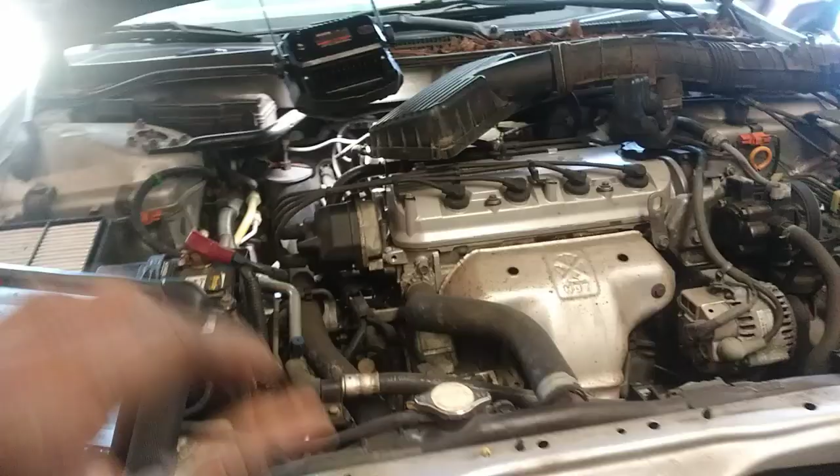Got a 2002 Honda Accord. It's got 2.3 VTEC. This car, of course, came from the dealer, the guy that's selling cars from the auction, and mind you, every time I get a car from him, it's always an interesting backstory, something interesting.

So I'm gonna cut the car down for a second, and we'll look at freeze frame data and give you the basics of what's going on with it, and we'll go ahead and tackle this issue, get this resolved, and out the door. I'm gonna go ahead and pull codes.

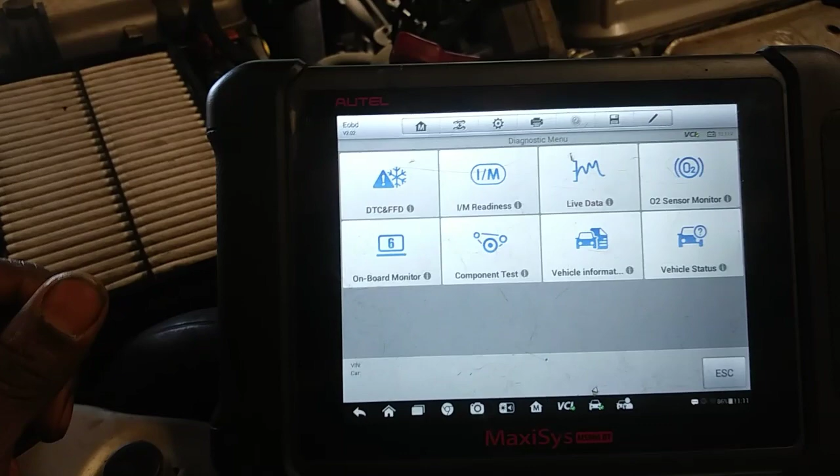I'm in the generic feature only because in the bidirectional portion, I didn't have the same information, and I didn't have as much PID data for bank 2. So some cars are better than others with the Autel, but I'm gonna stay in the generic portion here. The code that came up was dealing with the heating circuit for the downstream.

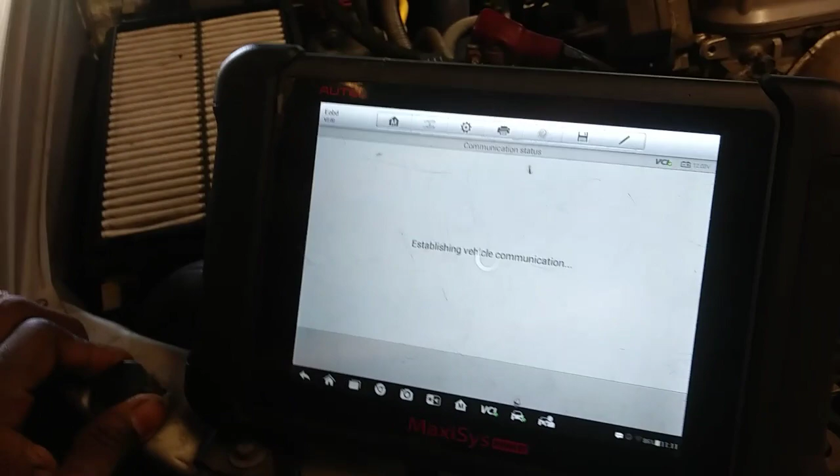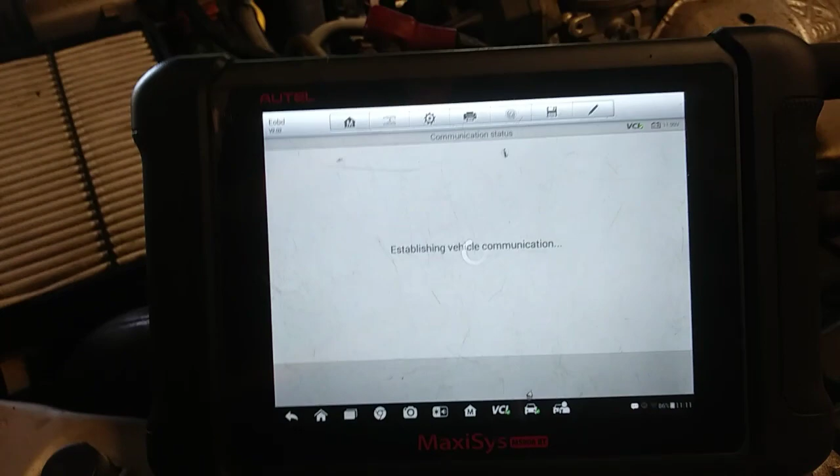From what I understand, the car's catalytic converter was stolen, so they put an aftermarket one on here with the aftermarket sensor. The aftermarket sensor has the Bosch shape. It's a Bosch sensor, and if I recall, Denso is what goes on here. Yeah, I think Denso. So this is the code P0141 O2 sensor heater circuit, bank 1, sensor 2.

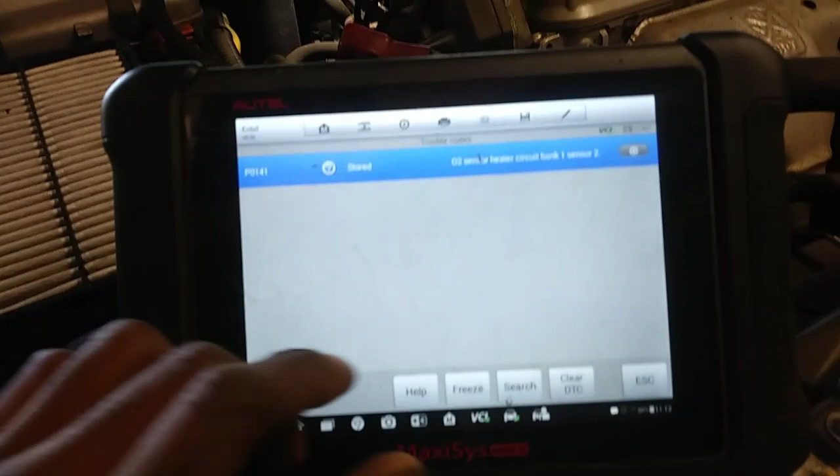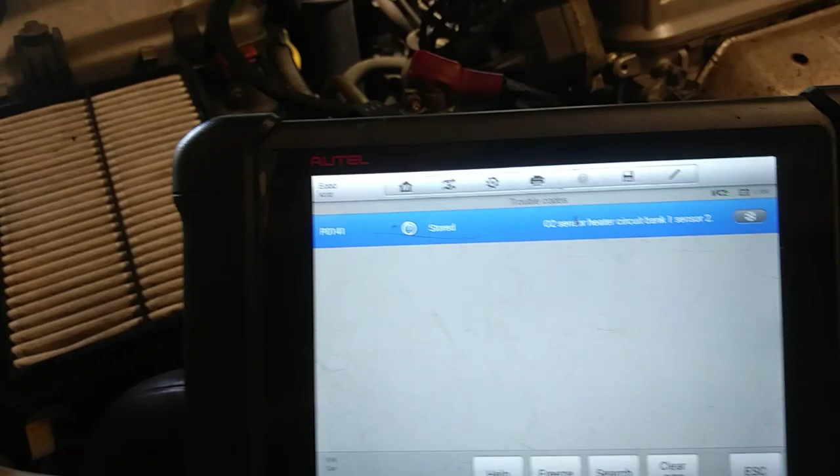So that code is basically stating that there was incorrect voltage during startup or after a certain amount of time. I think it was like after 80 seconds after startup, it was determined that there was incorrect voltage. So the sensor, it shouldn't be oscillating, but this is an oxygen sensor, so it should be between 100 millivolts and 900 millivolts.

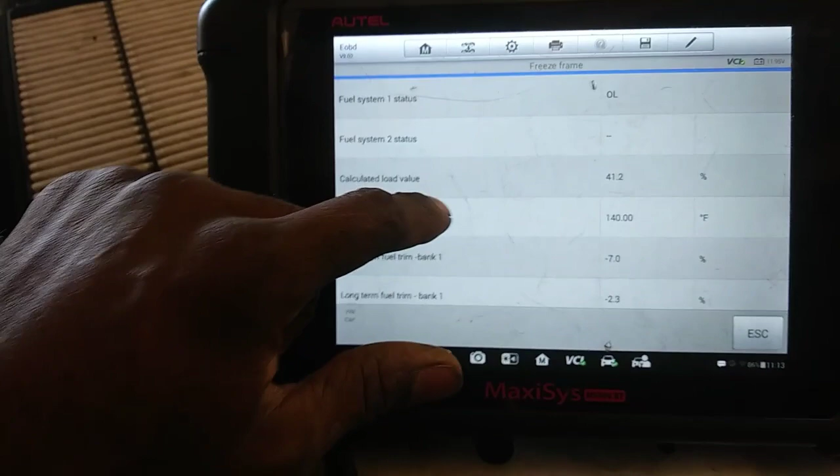So unfortunately, it determined that there was higher than normal voltage, and that's how we determined that there was a fault with the sensor here. So let's see what we got. If we look at the freeze frame data, so I can get zoomed in here, it doesn't show much as far as the running conditions of what happened, and it doesn't give me downstream information, and it's generally pretty useless

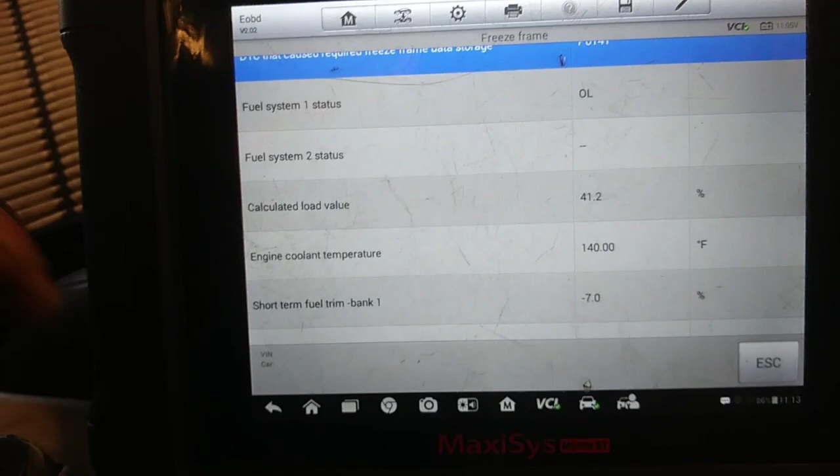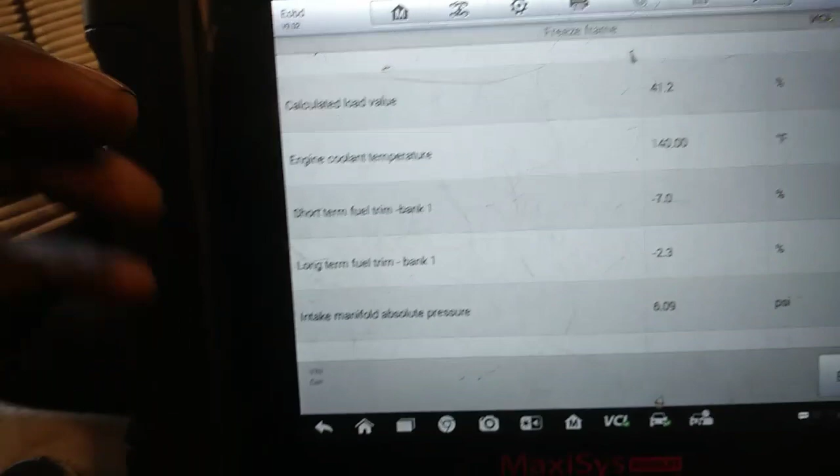for the catalyst issue. But if it was something more related to the primary upstream, this would be a lot more informative. But from what I observe, this is really not going to help me out to a degree, sorta. But what happened? The fuel system status was an open loop. So the oxygen sensor heater went through its monitoring phase in an open loop status.

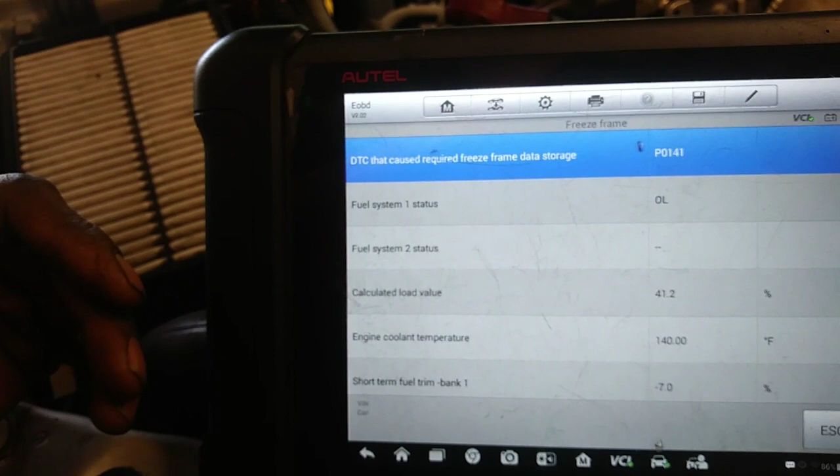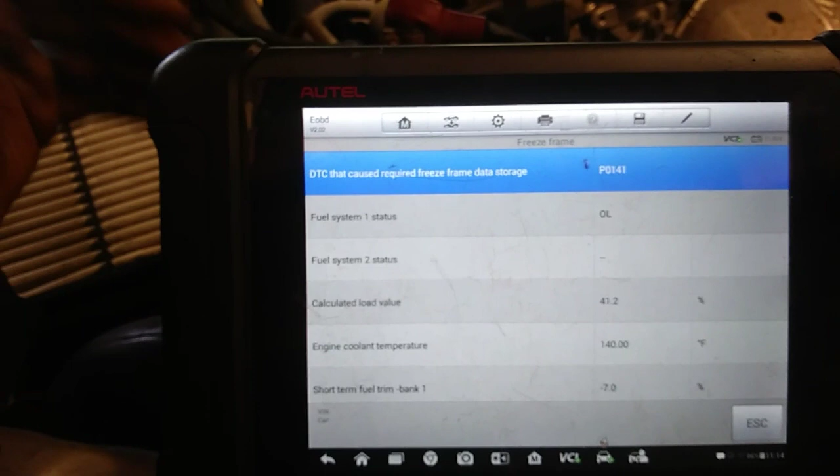So again, if it's running after 80 seconds, depending on the conditions or the temperatures for the monitors, it's going to go through its testing phase. Typically, drive cycles with oxygen sensors, your temperatures ideally want to be below 90 degrees on the coolant temperature and the air intake temperature. So if you look at the PID data, your intake temp sensor is below 90, the coolant temp sensor is below 90, and they're within 15 degrees of each other.

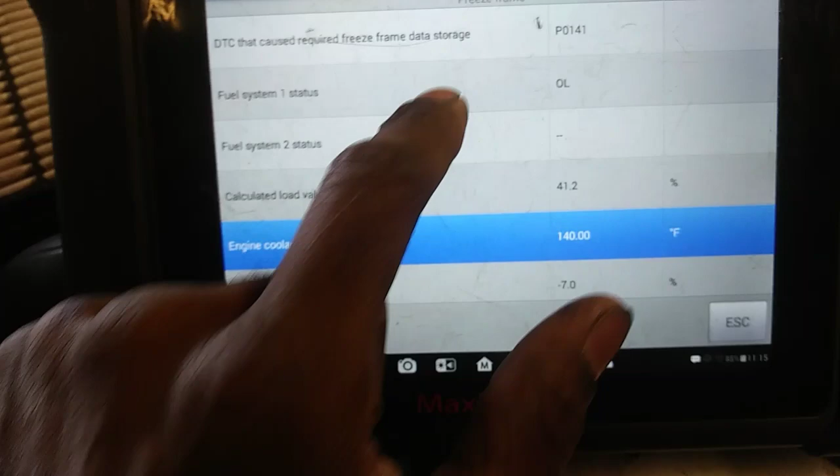The car is ready to go through the catalyst monitor, evap, and heater monitor circuit testing. So just FYI. So this determined there was a fault in open loop status. So the coolant was below 180 degrees, and we got 140 here. So open loop fuel system status. The car hasn't been running that long.

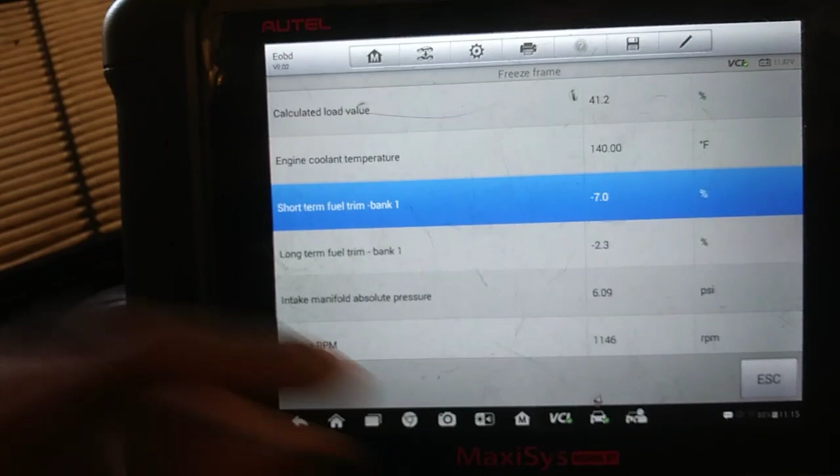Calculated load value is 41%. So it's a possibility, being that it's an open loop, that it was probably still warming up. Engine coolant temperature is 140. Short term fuel trim was at -7, which is taking away 7%. Long term is taking away 2. Again, the car was not in closed loop status.

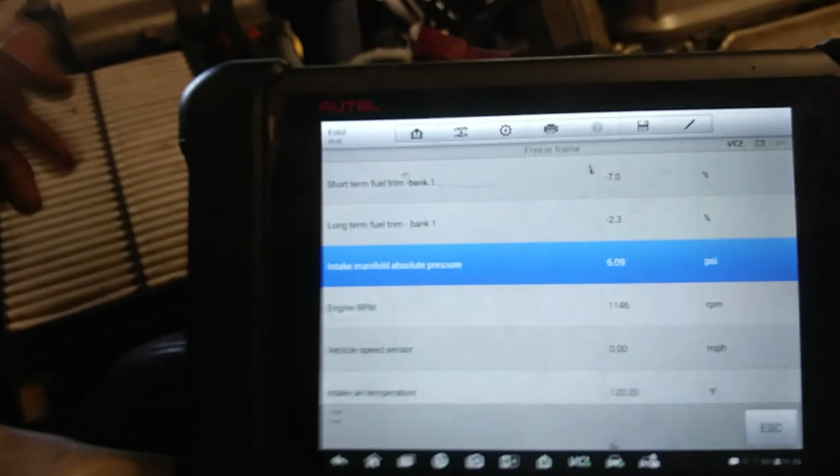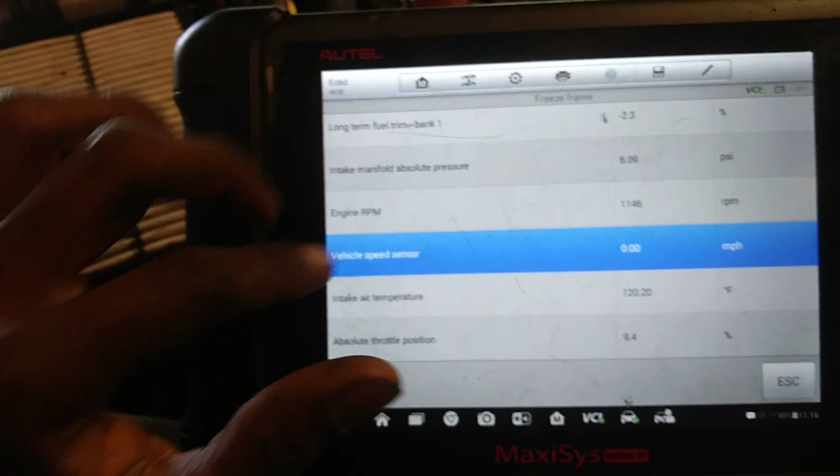Intake manifold pressure was 6.09 psi. So in vacuum, 14 psi is going to be the static of manifold pressure sensors, since atmospheric pressure is 14 psi. This is just an interpretation. RPM 1100, so it seemed like we're just at idle, no speed. Intake air temperature sensor was at 120, so the car seemed like it was just driving, came to a stop, and was still in the transition of warming up, going to closed loop.

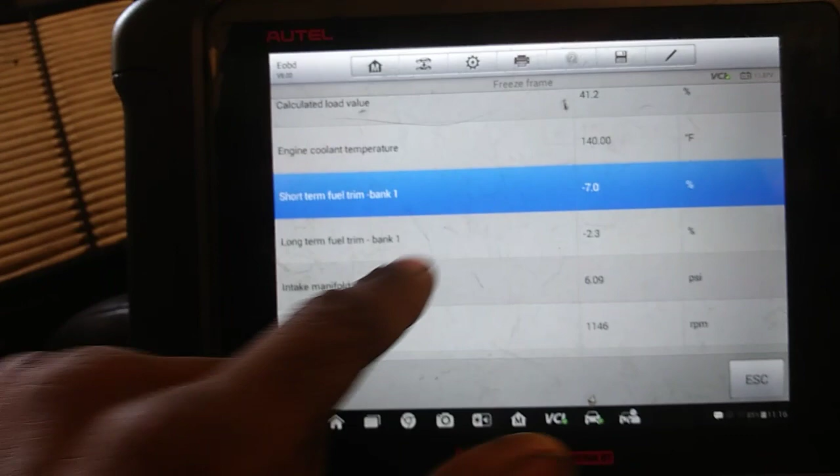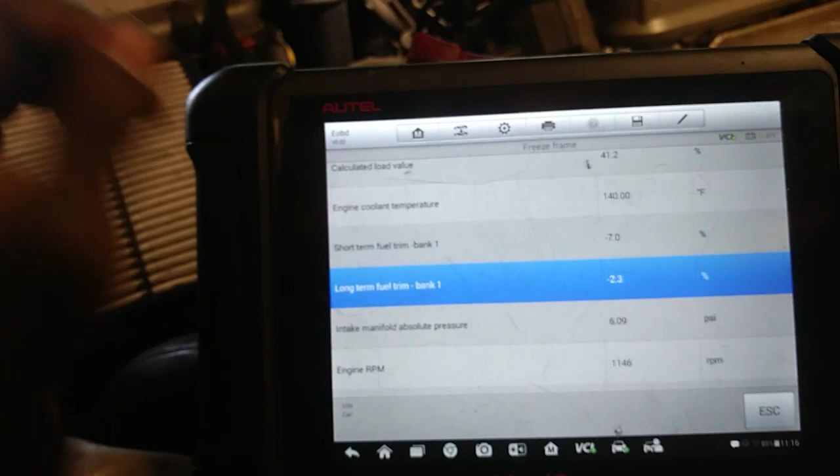Because throttle position is at 9% here. So the only thing this really does help and tell me is that, being that the short term is taking away -7%, the long term is not pegged out, so there's no way it could really have a direct or significant influence on downstream sensors. So with -2%, that's nothing. That's really insignificant.

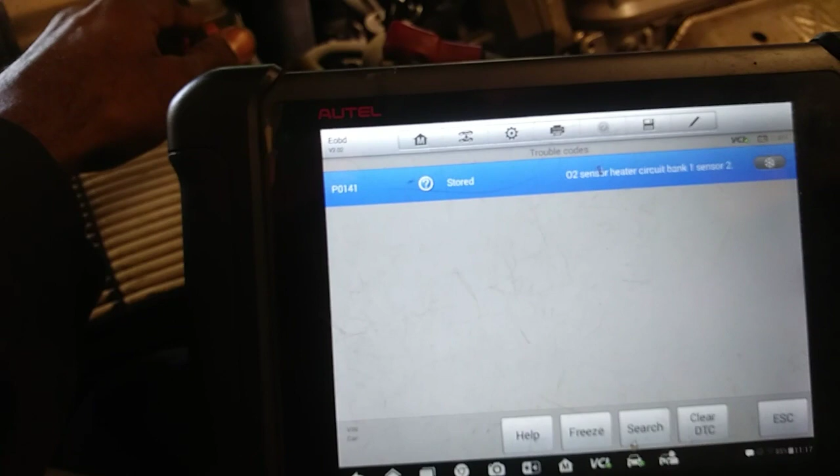So despite it being a heater circuit, I don't think this car is intelligent enough to know that there's a fault with the resistance in the heater. I think it only determines a fault based on the initial voltage. So this is just my conjecture, being that the code setting criteria was very vague. So again, it has to be running more than 80 seconds and determine that it was abnormally high voltage. Okay.

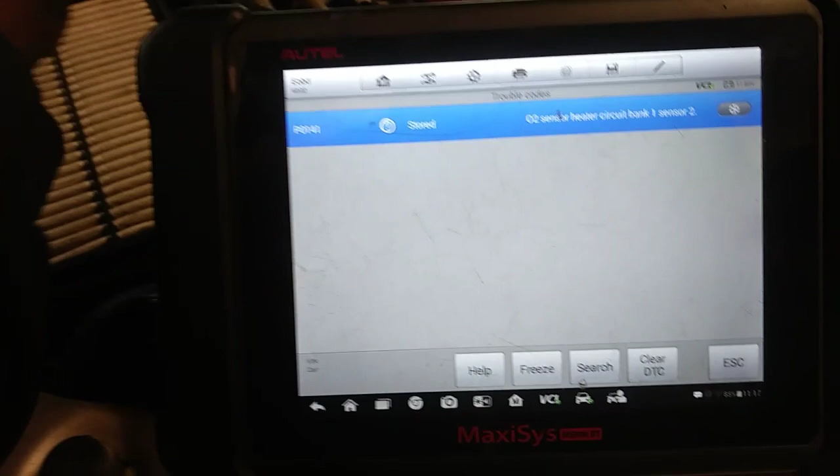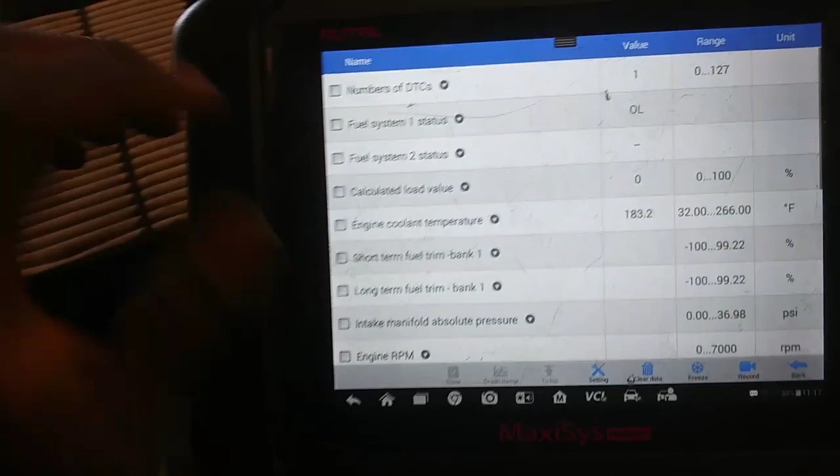So we are in the generic feature. I'm going to go to live data. I'm going to start the car up, monitor the voltage for the short term. We're going to look at temperature, calculated load, loop status, air intake temperature sensor, since we had that PID.

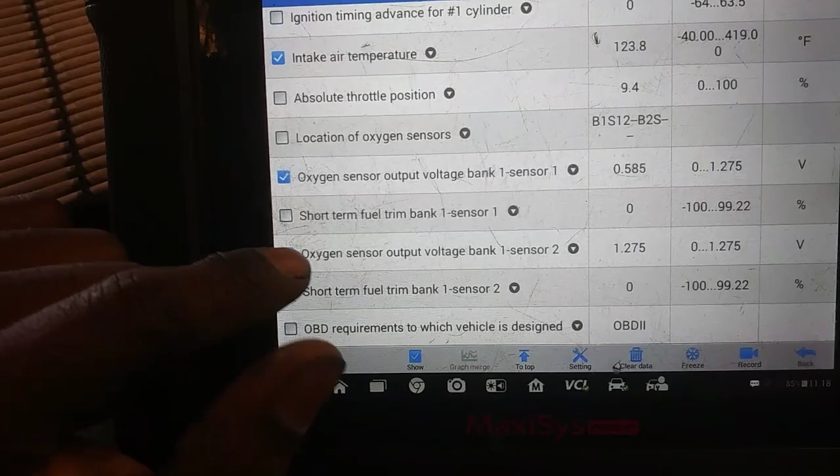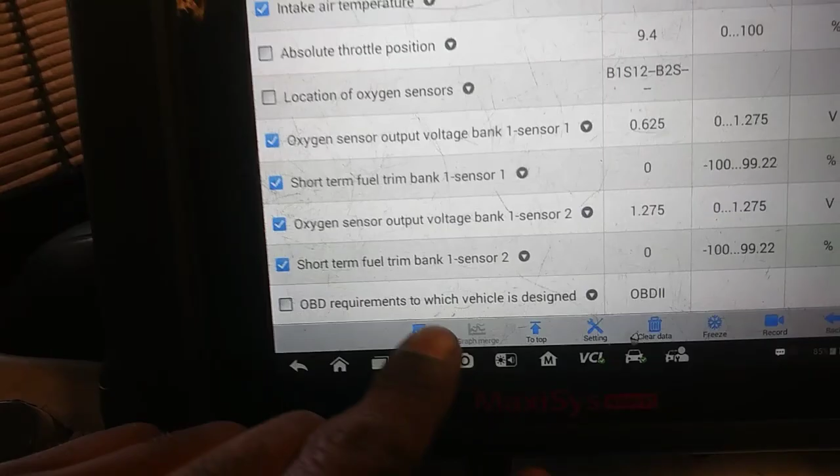We're going to look at the voltage here, and I don't know if you see there's a fault here. I do have that sensor plugged in, but that typical voltage there is normally when it's unplugged, so keep that in mind. And we're going to pull those up. Let's start the car up and look at data.

Alright, just in case anyone's wondering, the sensor, I took the intake tube off. It's going to be down there. So I get my light on. Here's my sensor for my downstream here. There's the harness. So if I need to do any testing, there's a connector I just broke off right there. Just a tab that's holding it. You can follow that and you'll see where it's supported. You can see it right there. And I'll just bring it through those air conditioning lines and up if I need to test it.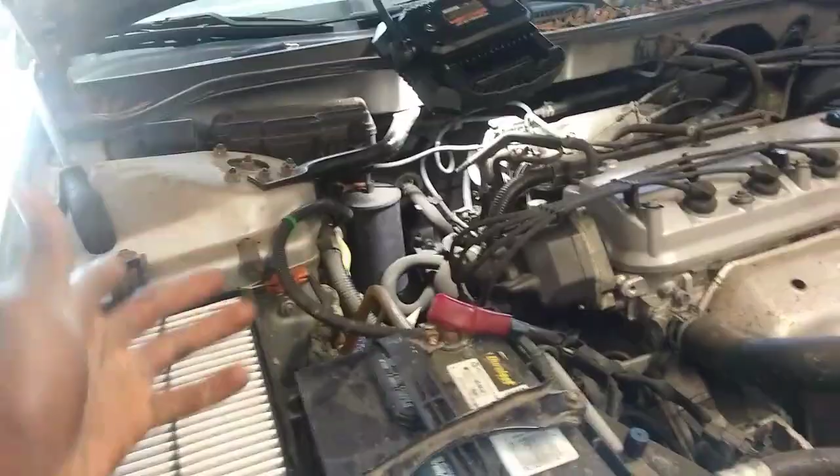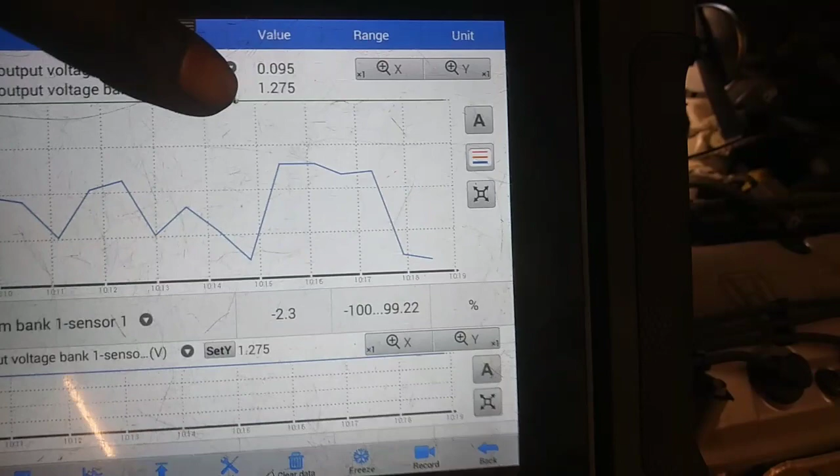But I don't think that's going to be our problem. I think this is simply just a bad O2 sensor, honestly. But let's look at it, and we'll do some basic tests and see if we can conclude that this oxygen sensor is bad and replace it. Alright, number one thing here, since we still have high voltage on bank 1, sensor 2, I'm going to mess with that connector first and see if there's a connection problem, see if that voltage changes. And if there is, then I'm going to check the connector.

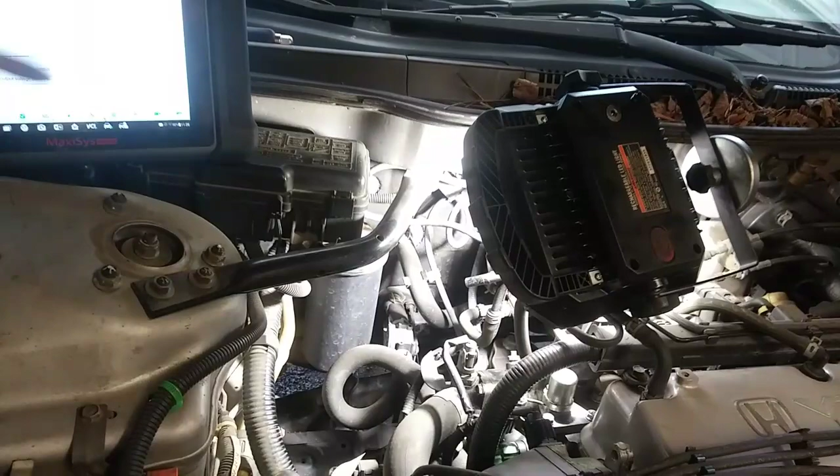There was no change. Another thing I'm going to do, simply just disconnect it. I could hook up on the signal side of the actual sensor and monitor the output from there, because it could just be an issue between the connector on back. And again, if somebody stole the converter, they probably could pull wires out. So it would be a wise decision just to pull the connector off, do some simple resistance tests, see if we get some type of backfeed, or a simple voltage test on the heating circuit, signal circuit, and see what happens. But I'm going to disconnect it first.

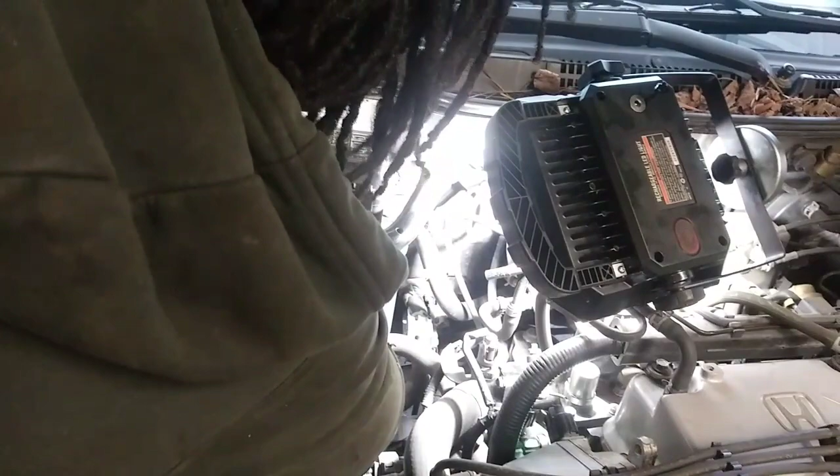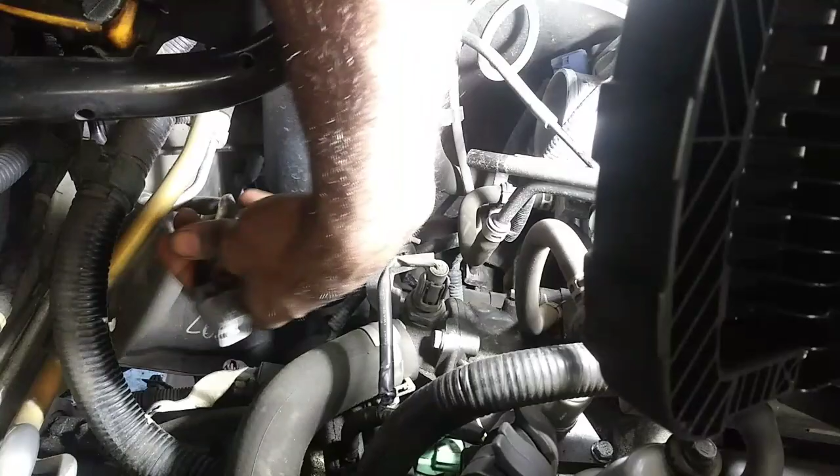So I disconnected. There was no change in the voltage. It's still high. Pull the sensor up here. Alright, let's do some quick tests on the sensor and see if our signal side is working like it's supposed to. So first thing, I got the key on, engine off. I'm going to check my ground here because there's a possibility the sensor might not be pulled to ground. So the ground here, since it doesn't have ultra low emissions, it's going to be this green and black wire here. And we're going to see if I can get my Fluke to stay put here.

Alright, so we're going to do ground. I'm going to put my red lead on the negative terminal. Get it to sit there, if it wants to cooperate. And do a quick test on the engine, if I got good ground or not. And I don't. Let me go find an alligator clip.

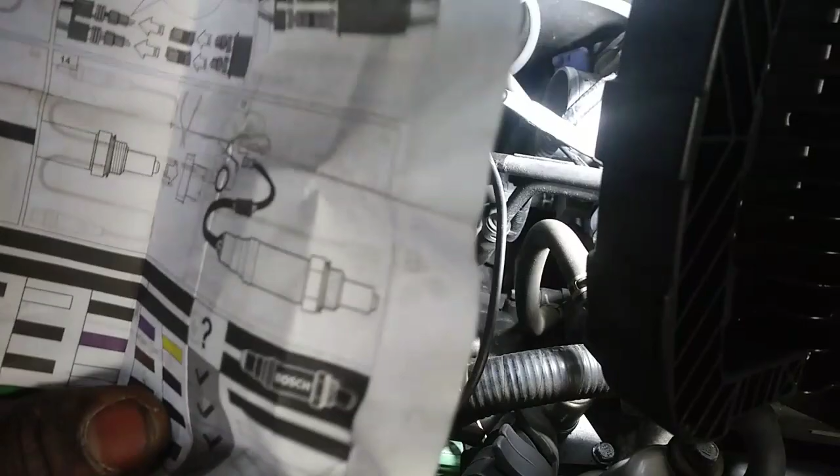Alright, got that. Now, if you don't know how the oxygen sensors are wired, one thing you can have is one of these universal wiring diagrams here. And I did this on one other video, I can't remember what the video was, but this is why I got this. So we can look at the wiring and get an idea where we need to be. I'm not using this, I'm using a wiring diagram, but if you don't have one, it's not a bad idea if you're just an introductory to dealing with oxygen sensors and wiring integrity.

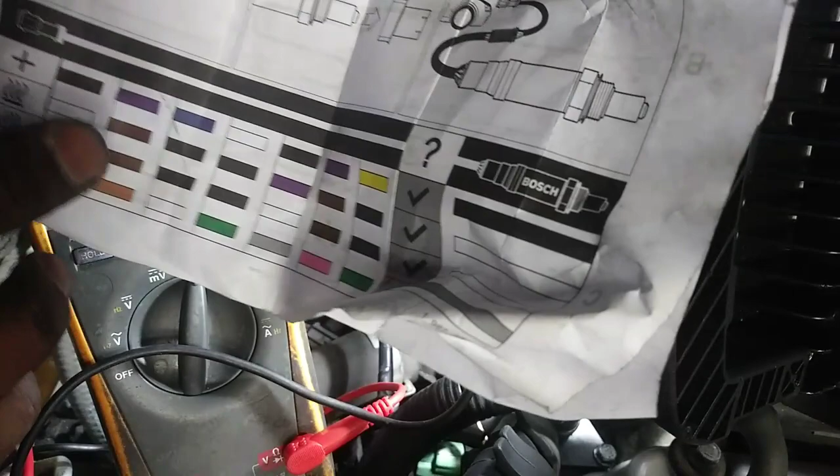So, for example, where am I? I know it's a green, so our green here is going to be ground, and that's where I'm going. So this does reflect ground here, so it is accurate with general vehicles. So alright, moving on. So we got good ground. Should be lower than that. Why isn't it lower?

I need like 2 ohms or 1 ohm or something. Probably because the throttle body probably isn't the best ground. Yeah. Nope. Let me switch them. Yeah, they're different. I'm pretty sure it has a lot to do with my ground here. The car might not be that great with the ground straps, but that's still low enough to be able to hold some amp draw. So I'm gonna leave that where it is. If it'll support my test light, I'm not gonna question it.

So here we're going on the green and black down at the bottom here. We got 14 ohms. The problem is, I would like ideally for my ground to be a lot lower than that. Let's see here if I move it around. And what I could do, test the front, see if the front has the same type of resistance value.

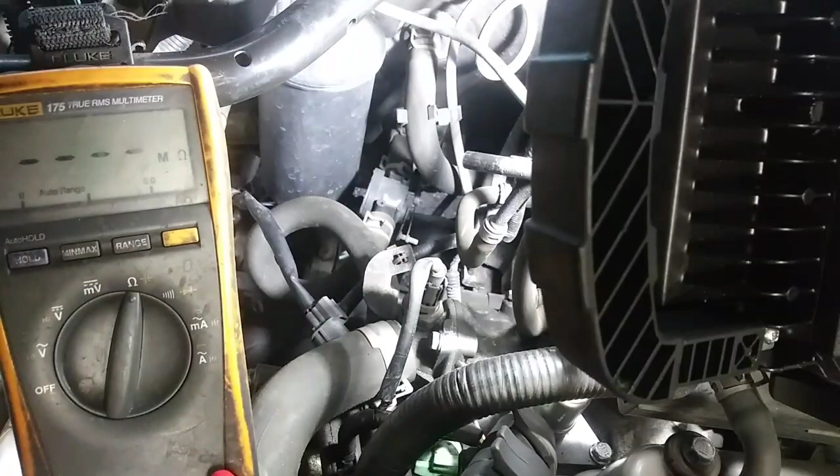Being that it's a switching circuit, normally the ground side switch for it, I'm going to just do a resistance test and test it that way. And I'm just gonna go to ground, pull my connector for the sensor one, go to my black and white wire, do a resistance test on there. Make sure my connection's good here.

Alright, I had them hooked up backwards. So I got my positive on negative, and I'm getting a 209 k ohm reading. So I'm just simply gonna do the same for the front here. For the rear, the downstream, and find my black. Find my black and white. Here we go.

210 k ohm. So they're within 5% or so. So we're good. I think that sensor's just bad, man. Just simply put, there's no issue with the wires being pulled or anything. They were comparable with the upstream. The sensor's just not working.

So what I'll do, just to make sure there's no connector problem, try to hook up to the signal side and pull the signaling side down, and we'll see if it reflects in the PCM. If it does, I'm just going to simply replace that oxygen sensor on the downstream here. That'll be good. Just gonna keep this simple.

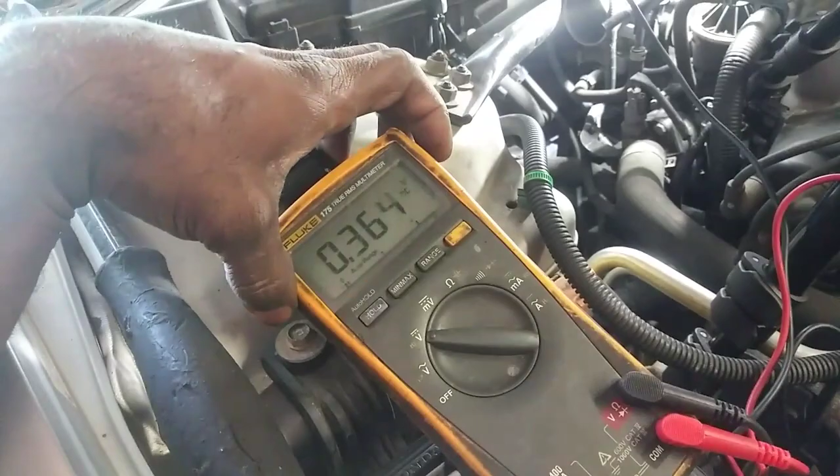So I'm going to start it up, let it go into closed loop, and see if we have some oscillation or any type of flat line or any type of spikes, or look for any discrepancies with the sensor voltage once it's running in closed loop.

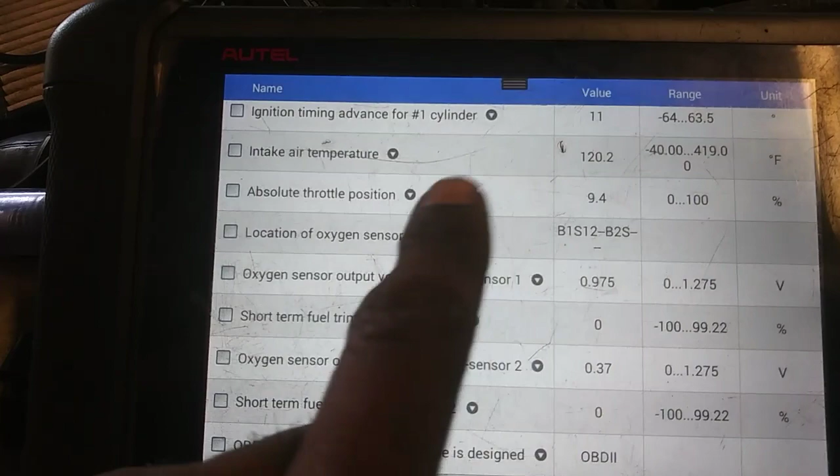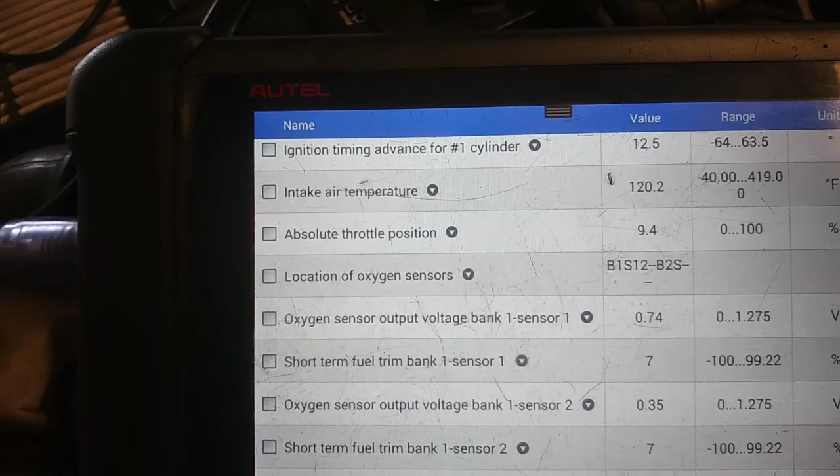Alright, so right now, since we got the car running, we should be in closed loop now, since bank 1, sensor 1 is starting to oscillate, and downstream sensor 2 is stuck at 350 millivolts. So before it was stuck at 1.2 volts, now it dropped down to 350 millivolts. Not sure why, but it may have been a connection problem with this sensor.

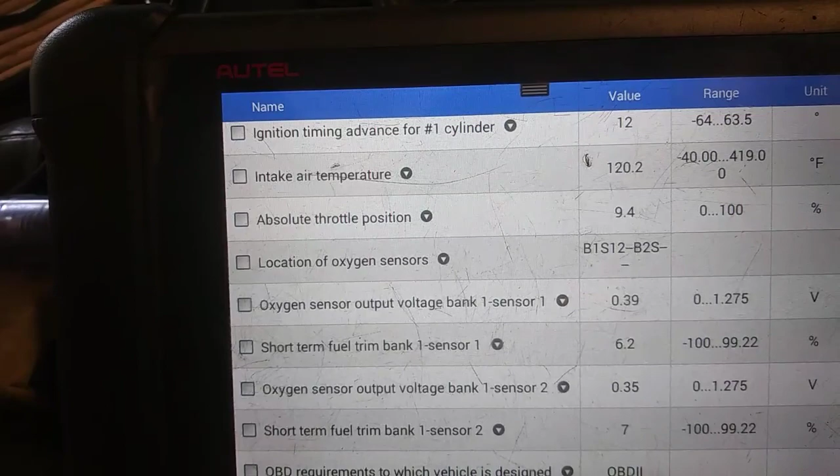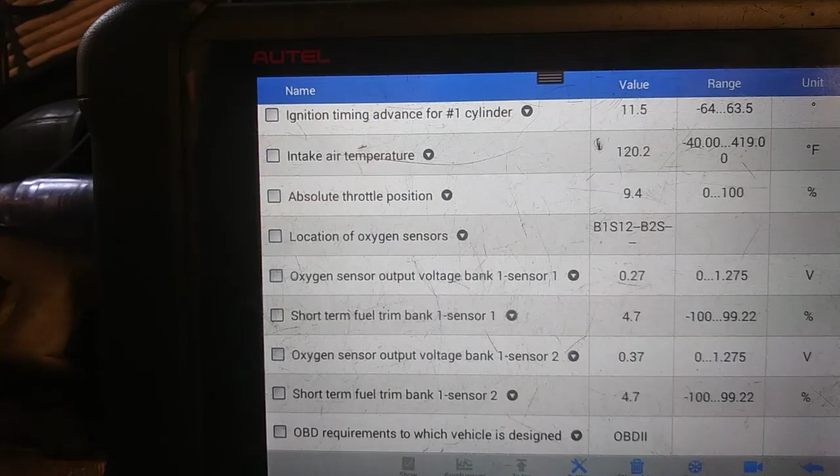But despite me connecting and reconnecting it several times, it could just be something that's intermittently going out under certain conditions inside the sensor. Not sure yet. But I'm going to monitor this for a little while, give it gas, rev it up, maybe add a little fuel to it and see if it changes downstream. But currently it's working normal. This is how the downstream sensor is supposed to operate. So I'm going to let it do its thing and wait on it to have some faults.

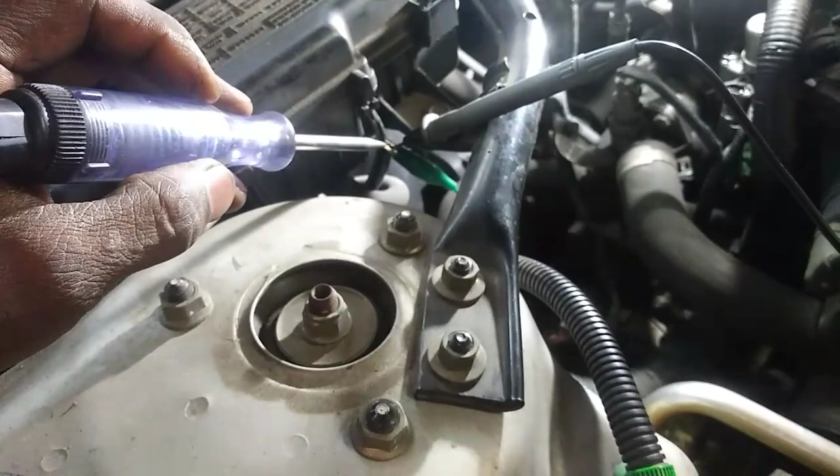Now, like I was saying earlier, see if I can pull the sensor down. I do have my test light here, and this is going to be my high resistance ground. This is the safest method of pulling anything to ground or supplying power. Since we have the reflection of the sensor voltage here, this test light is grounded. I'm simply going to place my piercing tip on the alligator clamp that's connected to my signal wire, and the voltage should drop.

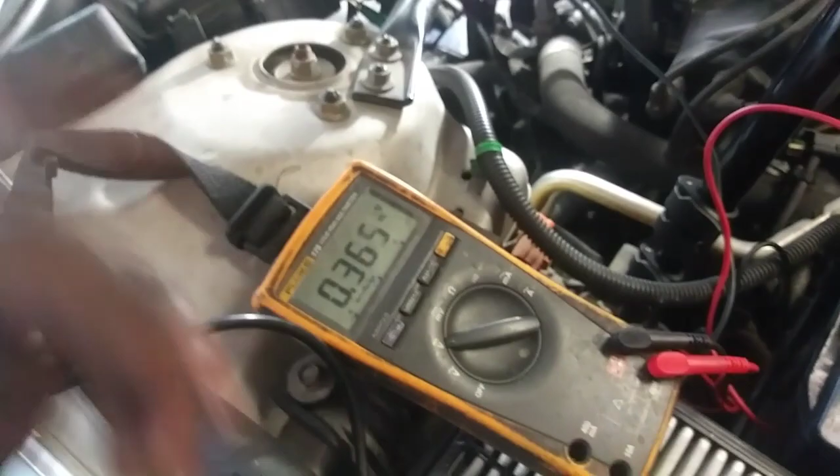And yeah, so what that means is that we're capable of controlling the signal side. We can bring it down to ground. Also, if I touch the positive side, I can also bring the voltage up. Hold on one second. So I'm going to touch the positive side of the battery. I'm going to be the resistor, and the sensor should be drawn up toward battery voltage. I think it came off.

So all right, this is our current voltage. I'm going to grab one in here. I don't know if I can get everything on camera. I think we'll be fine with this. So my fingers are going to touch the positive side. Now I'm going to touch the input side of the sensor here, and we brought the voltage up.

I'm going to let off of it. It went back down. I'm going to touch it again, and I'm simply bringing the voltage up. So I can control that, and just show you what it looks like. I'm grabbing it. The voltage is climbing, and it drops. So that's one quick way of testing the signal side. I should also be able to ground it by grounding myself.

And grabbing the input side, but unfortunately that's not working the same, probably because I could be getting some interference from the ignition system. That's why we have noise reducers and stuff on the engine. So it did reflect pulling it to ground. It did reflect pulling it to high voltage. So strangely, the sensor's working fine.

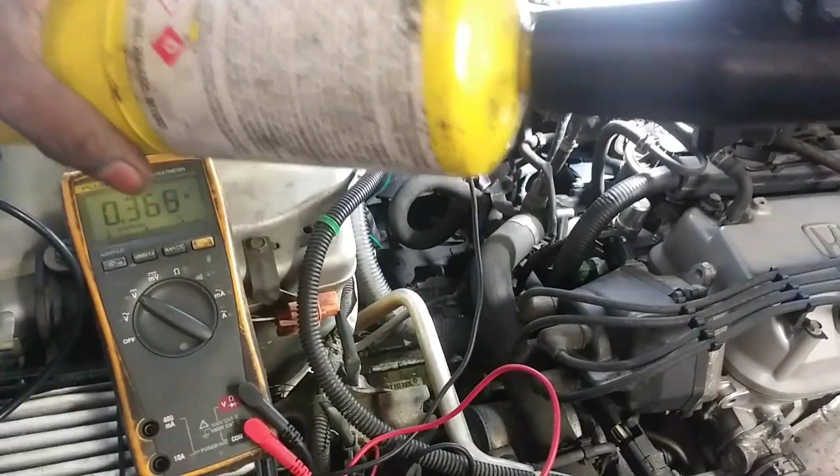One other thing I can do is administer some fuel in the intake and see if it produces a richer condition. Alright, I don't have any propane, so I'm going to use my MAPP gas here. And it should make the downstream sensor rich. I am now administering MAPP gas. So if low is lean, this should go up to, you know, like 400, 500 millivolts.

And I'm going to look at the upstream sensor here, and my upstream sensor is currently almost pegged out. It's at 900 millivolts. The downstream is not reflecting, and it could be a couple reasons. Probably because not a significant amount of fuel, because the catalyst is a furnace and it's supposed to burn off these noxious emissions. Let me give it a little gas.

I'm going to try to force it richer by adding brake cleaner and seeing if that will cause the downstream sensor to reflect also. Alright, pardon me. Let's see if I can get in here.

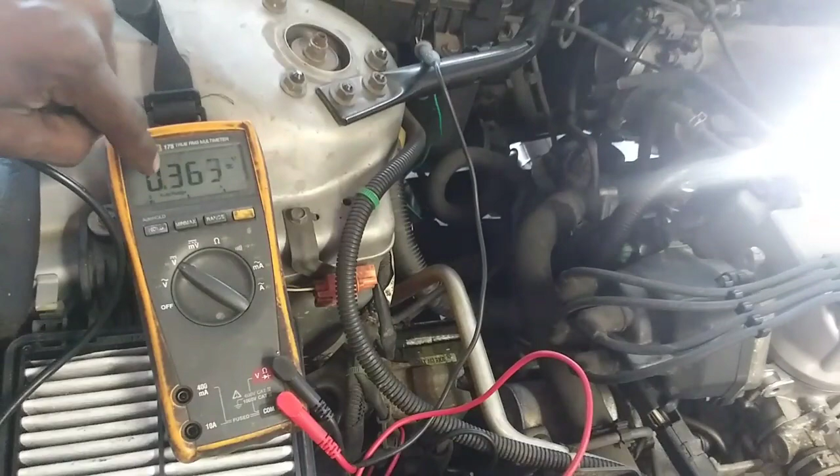Alright, so it's still stuck at 350 millivolts, 360 millivolts. So this sensor's shot. I mean, now the short-term fuel trims are taking away 14% because it's trying to compensate for those rich conditions. The initial fuel trims are lean. As a result, this is stuck. I'm going to replace this oxygen sensor on bank 2, and we should be good to go.

Let's do one more test here. I want to pull the sensor out and simply do a resistance test from the connector down to the head of the sensor, or depending on how you're looking at it, where the wires go into the sensor. So I'm gonna pull the sensor out, we'll do a quick resistance test, and I think that will conclude the sensor is actually defective. Because if not, we can repair that broken wire and still use the old sensor. It's brand new, so let's see what happens.

And I'm only doing this because, for one, just to confirm that we are 100% sure that this is bad, and then two, when I got moving the wire, it did start changing the numbers on the scan tool, going up to like 400 millivolts at times. So why not? All right, let's try an alternative route, because the last one wasn't cooperating.

So we're going to go into black right here. Put our alligator clip, the black there. Let that rest somewhere. Here. And I'm going to go back there. We're going to carry on our resistance test. Alright, so let's get a good spot. I was killing this wire. Move it around. Damn it, what is hot?

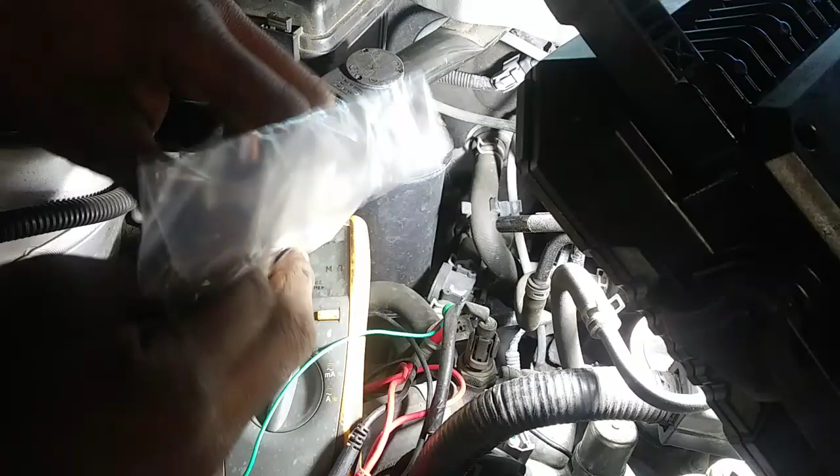So I got a new sensor. Got a Denso from O'Reilly's. And here's the part number if anybody gives two shits. So really quick, I'm just curious, I'm gonna test the heating circuit with this new one and compare it to the old one, just for my knowledge, and get this installed.

Let's take a look at the old one though. Like I said, it was brand new. It's got a new connector. That was from me beating on the damn thing. So the connector's new. We see some obvious differences. This is a Bosch, this is a Denso, and we see the structural differences. The body's more slender, the head of it's different where it retrieves a signal, gets on the side versus on the head of it.

Alright, let's get our ohm meter. We got a mess, man, I'm gonna tell you that. We got a lot of wires everywhere. Alright, we're gonna test the resistance of the heating circuit. The heating circuit is going to have the same color coded wires. Like on this Bosch here, they're going to be white. On the Denso, both of them are going to be black.

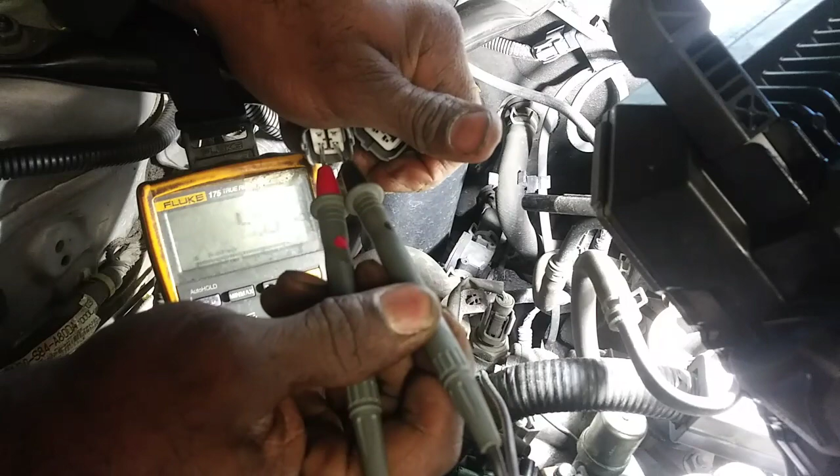Alright, so I got my tester on resistance, the little horseshoe thingamabob, and we're just going to simply pierce those two wires with the opposite piercing ends and get a value. Let's see what this one is. We got... How's it doing it? Just jumping everywhere.

It's weird, just jumping everywhere. Wasn't steady. Alright, so we got, let's see, 3.5 ohms with the Bosch. Oh shit. I don't think it matters, it's going in the garbage anyway. And the two black wires on the Denso, we have a value of 16 ohms. Yeah, 16.1 ohms. Cool. So, new sensor versus old.

So I want to get this installed. We'll look at the data, conclude the video, and go on to the next one. See you in a second.

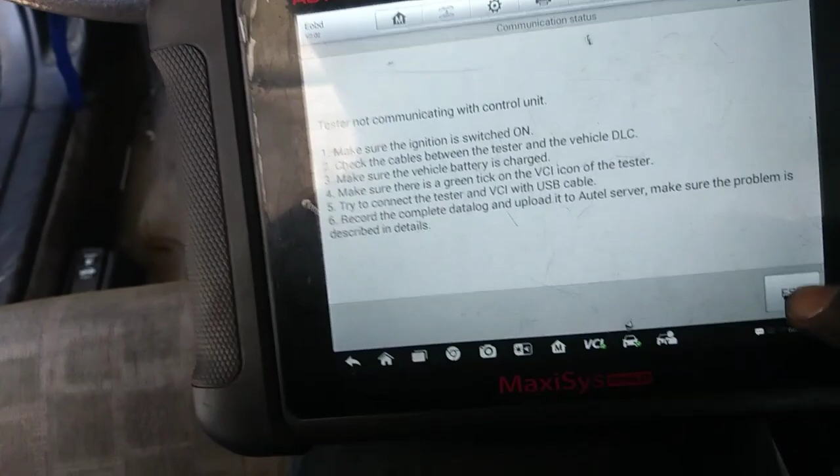Alright, we got a new sensor in there. I'm just going to try to get connected really quick. Didn't take but like 90 seconds to get that sensor installed. I'm not going to clear the code yet, but we're just going to look at live data to confirm the fix. Before, it was basically an open circuit, standing at 1.2 volts. After testing, for some strange reason, the voltage dropped to 350 millivolts.

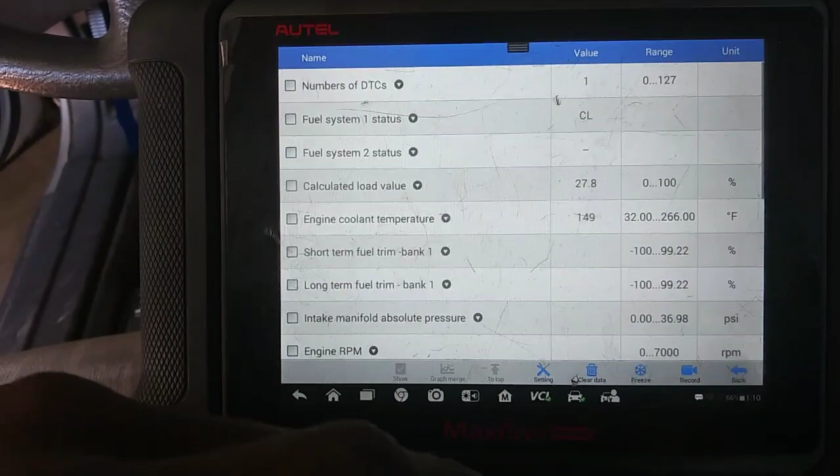If this don't work, I'm quitting and going to Family Dollar, so be prepared for Family Dollar uploads. So here we go.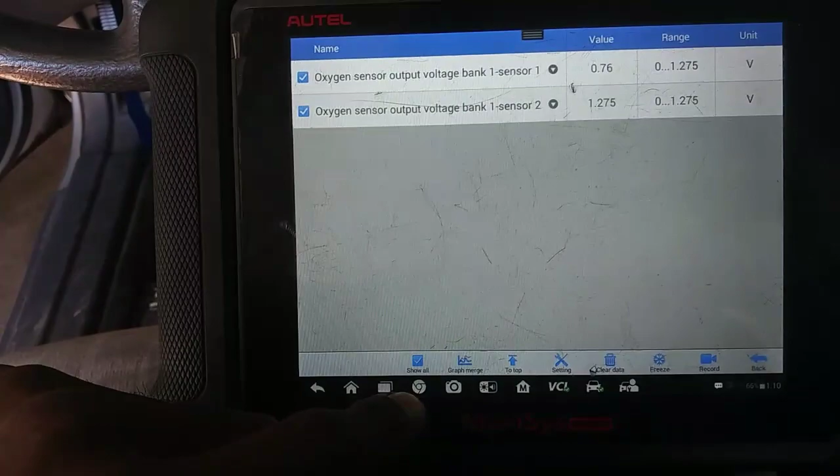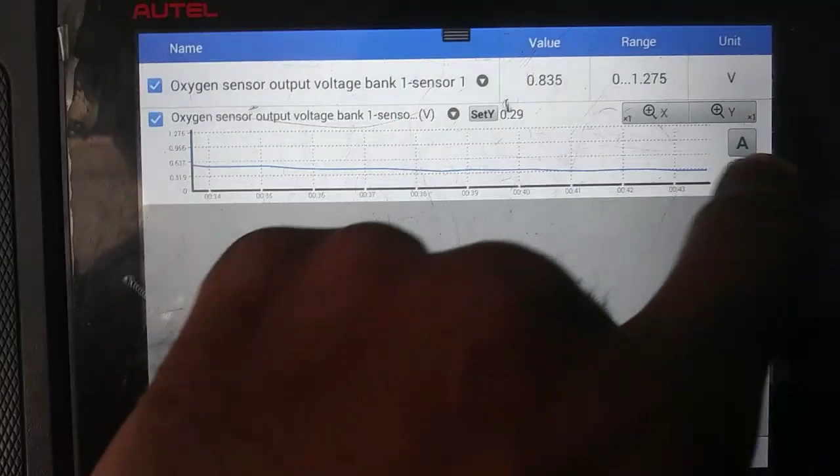So we haven't really entered closed loop yet, so I'm going to let the sensor warm up. Let me look at the temperature. So we are in closed loop. I'm just going to give it a second for it to get hot. Yep, there we go. We're dropping. There it goes. Let's look at the graph. That was nice. It was a nice slow slant. Look at that. We got operation.

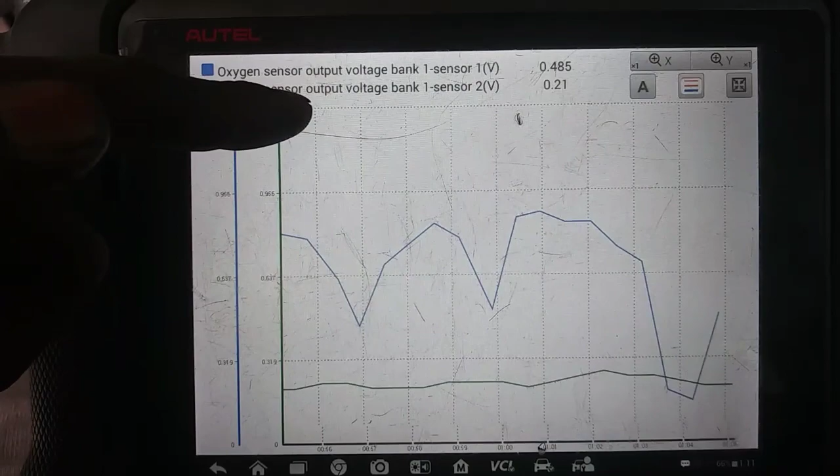And it should reflect the upstream here also. Let me merge these graphs here. Bam. So our green is going to be sensor 2. Before it was stuck up at 1.2 volts. Now we have somewhat of oscillation, but steady, slow reading like a post-cat sensor is supposed to. For the most part, the frequency is 60% less oscillation than the upstream, and it's nearly flatlining. So this is great, and it's reflecting our initial readings here.

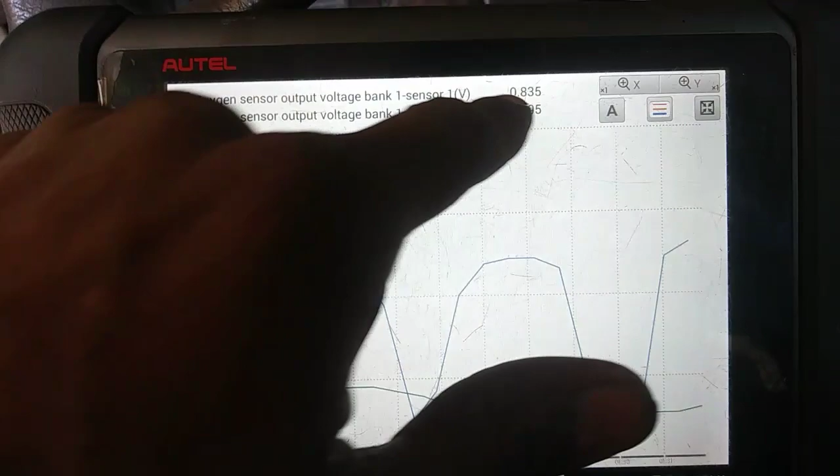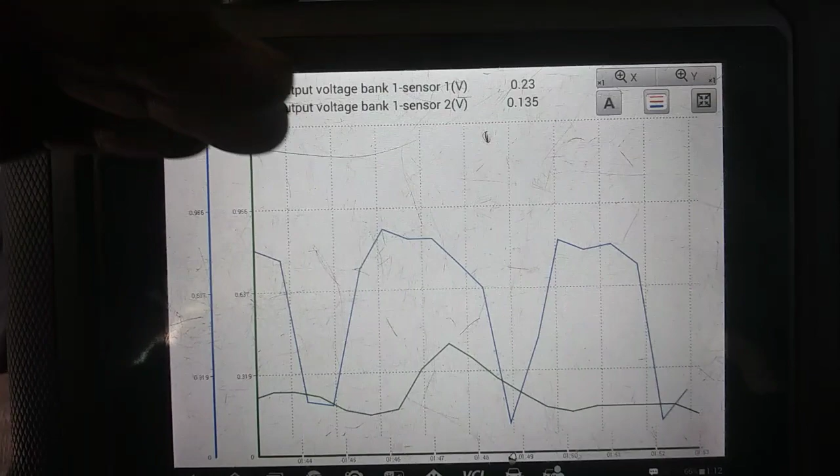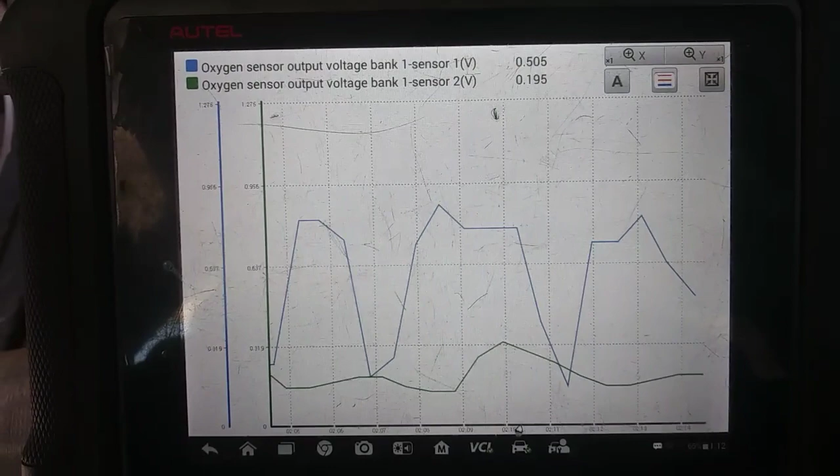So again, once it gets hot, it's going to become a lot more steady. But being that the sensor's new and the car was off for a little bit, that converter needs to be good and warm. So this is fixed. It's reflective of the initial reading. So again, the catalyst purpose is to get hot, burn off those rich mixtures, those noxious emissions, and basically keep that oscillation that we see from the initial balance settled steady. So we see the downstream stabilized in comparison to the rich and lean oscillation of the pre-cat sensor, if that makes sense. So this is good.

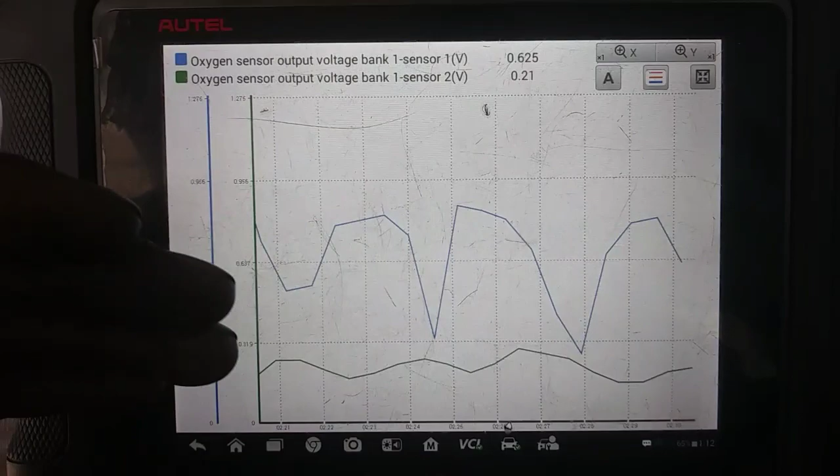Again, when you have a rich running condition, that catalytic converter is supposed to burn all that stuff off and make it into a leaner mixture, and it's doing its job right now. So low is lean, high is rich when it comes to an oxygen sensor. We don't have any oscillation on the post-cat sensor. We do with the pre-cat, which is normal. The post-cat is working like it's supposed to. It's great.

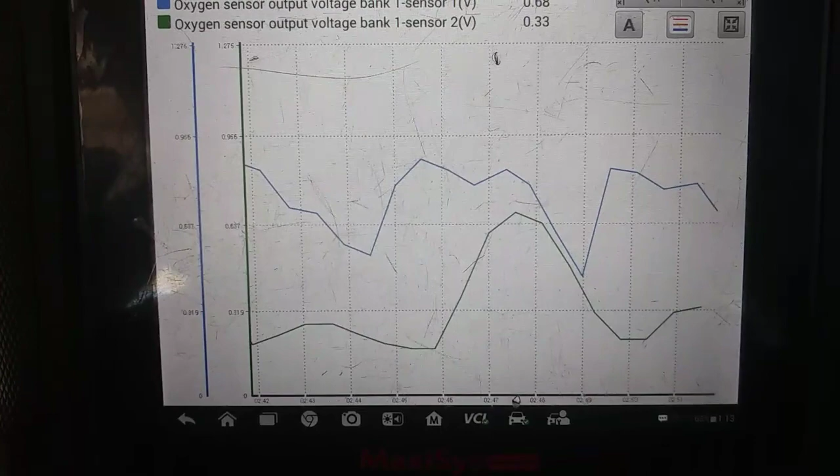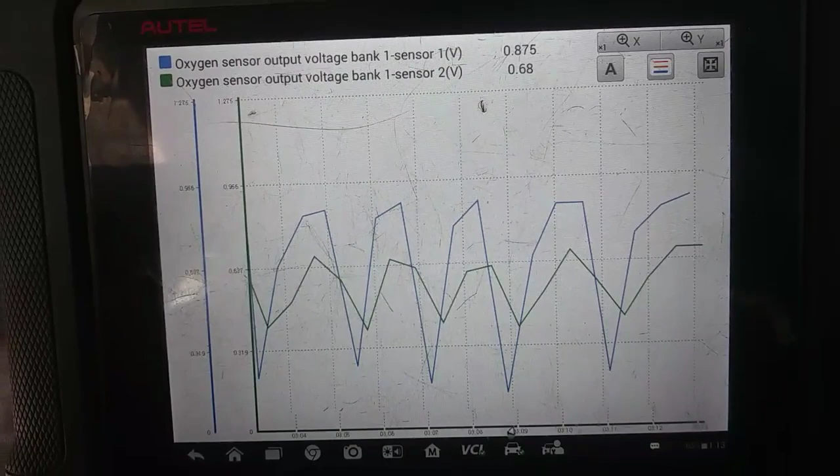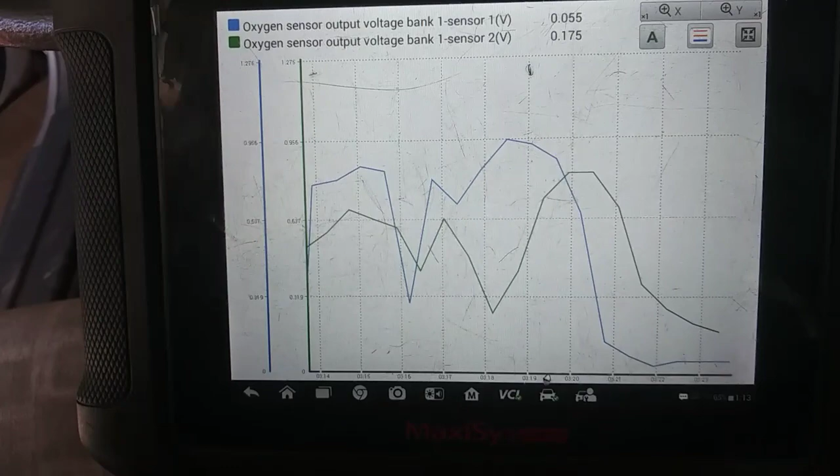So now the ultimate test obviously will be driving under load conditions and seeing if it could stabilize its voltage while at highway speeds. The cat is pretty new, so it wouldn't surprise me if it does or it doesn't work, but I'm pretty sure we'll be good with this new cat here. The welds are great. There don't seem to be any exhaust leaks. It wasn't any issue on their part on installation, it was just a defective part.

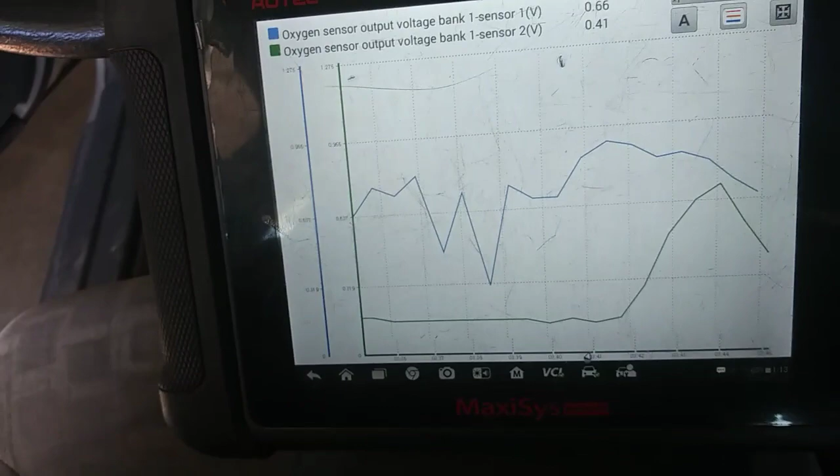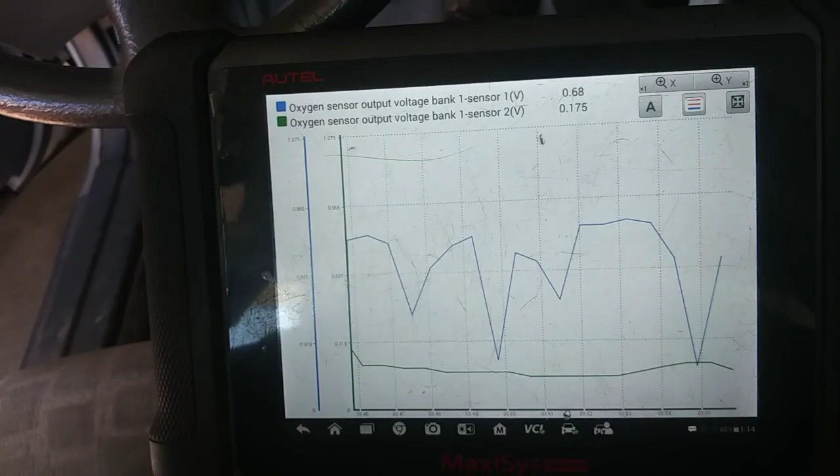It's a Bosch sensor, aftermarket. Things happen. People can question the quality of it. You know, it don't belong in this car. Things go bad, so what can we do about it? But other than that, hey, this car is fixed. We didn't have oscillation before. We have readings now. We went through a full test of how to test oxygen sensors. Hopefully some people learned some things new.

You know, you can use the resistor, pull that sensor to the ground. You can increase the voltage, see if it reflects with the sensor signaling or PCM inputs, and should be good to go. But you know, there's 1,000 videos on this. I don't know. Hopefully it should have been something a little different.